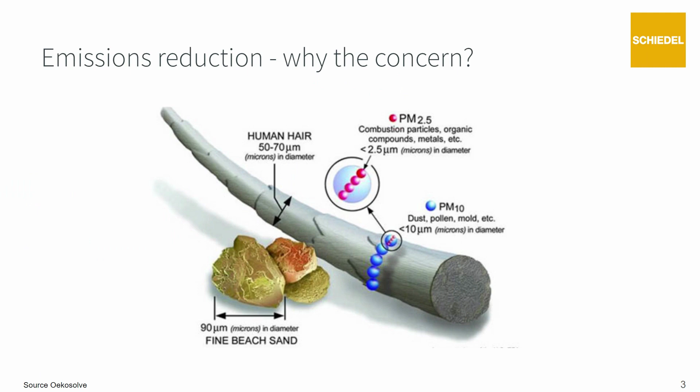So this is why there's concern, because once you breathe these particles in, they get very deep inside the lungs, into the bloodstream. So here is where the damage can be caused. When we breathe in air, we're breathing in a mixture of liquids, gases, and solids, which includes water and oxygen, but also dust, pollen, and other airborne chemicals and particles, which are known collectively as particulate matter, or PM.

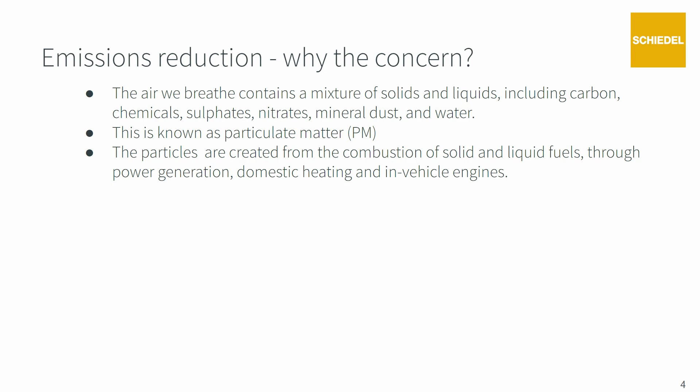The smallest PM particles are created from multiple sources, which include the combustion of solid and liquid fuels, power generation, domestic heating, vehicle engine emissions, and even friction from tires and brakes on vehicles. The most damaging particles are minuscule particles, known as PM10 or PM2.5. The most damaging particles are the very smallest because they get the furthest into the body. Invisible to the naked eye, they're small enough to pass through the lungs, into the bloodstream and into the organs where they can cause damage.

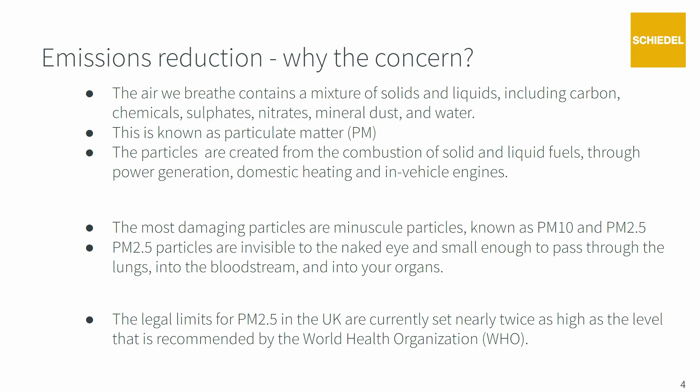Legal limits for PM2.5 in the UK are currently set at nearly twice the level that is recommended by the World Health Organization. So this is something that has to change and will be changing as we go forward. These limits are going to be reduced, and therefore we as an industry must play our part in resolving the issue. We have to lead the argument and we have to bring solutions to the table.

There has been a lot of scientific work carried out to study this area. One of the leading countries in Europe in this field is Germany. Following studies in Germany, they estimate that 16% of all fine dust matter can be allocated to emissions from wood-burning appliances. DEFRA in the UK originally estimated this figure to be 38%, but following more recent studies, they've now moved far more in line with Germany and other European markets, and now estimate the figure to be around 17%. So it's pretty much in the same ballpark as the German figures.

This fine dust can be highly toxic and there is a risk of disease of the respiratory tract and cardiovascular system. Fine dust is most concentrated close to the source of the emissions, so this is where action needs to be taken first. As we can see from the pie chart here, sourced from the Bavarian Office of the Environment, vehicle emissions from exhaust gases and dust from tires and brakes amounted to around 57% of total emissions in their study. However, as we know, things are moving forward. There is a major move towards electric cars. This will reduce exhaust emissions going forward, although not the dust from tires and brakes.

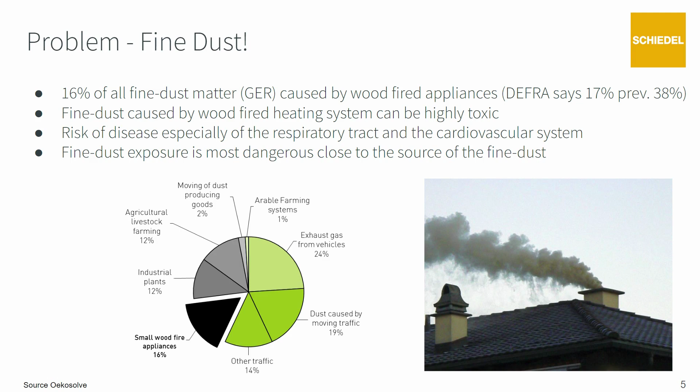So what are we doing as an industry? We too have got to move forward. Let's look at what we can do now to actually help with this in a practical way. First thing we can do is to ensure the best possible combustion of the fuels used within the appliances. We can offer room-sealed systems with controllable primary and secondary air. We should always use good quality fuel. So dry wood with maximum 20% of humidity will help.

A high-quality chimney system working with a high-quality stove needs to be well maintained. So the end user and the chimney sweep have a huge role to play in this. Schiedel recommends regular cleaning of the chimney system to maintain performance. This is covered in our installation instructions, covering ongoing maintenance post-installation, where we recommend that any chimney serving a solid fuel appliance should be swept twice a year. Even the correct lighting of the fire will help reduce emissions, so end user awareness is critical, and here the chimney sweep can also play an important role in ensuring that the end user is aware of best practice.

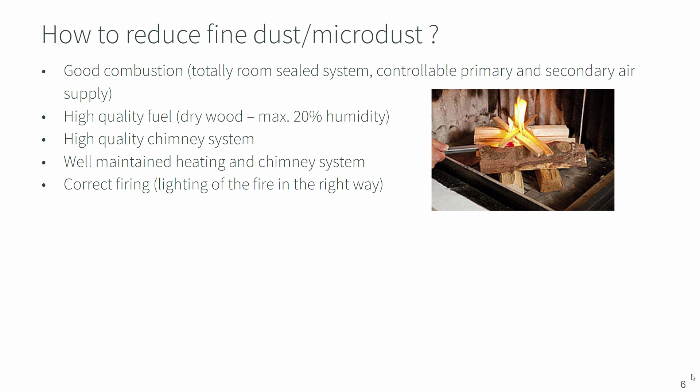We have already taken major steps within the industry. The Stove Industry Alliance, the SIA, estimates that by using an eco-design compliant stove using high-quality fuel, this would reduce total emissions of the smallest particles, the PM2.5, to less than 1.5% of total UK emissions of these smallest particles. Appliances accredited to Clear Skies, in an initiative led by our industry, will reduce these emission figures still further. This is great news going forward.

However, what about the appliances that are already in place and which do not benefit from this latest technology? This is where we need to be looking at things. We need to be providing solutions for the existing appliances to improve their performance and work with councils to show what can be done using retrofit solutions.

At a time when the cost of heating our homes is becoming ever more of a burning issue, the wood-burning stove can provide an economical solution, and together with the appropriate filter, can help reduce fine dust emissions by anything between 70 and 95%. Clearly, it will depend on the appliance that is in situ already. It will depend on the quality of the wood that's being burnt as to how efficient it can be.

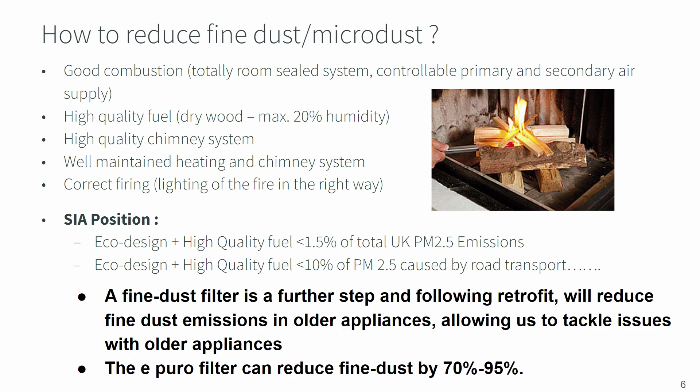As we build up in the cycles, it becomes more efficient up to a certain point, but then we need to ensure that there is regular maintenance and sweeping of the chimney to ensure the performance of the appliance is not reduced through the flue way becoming restricted.

So in terms of practical solutions, what can we offer now? When we look at the technologies that are already available out there, there are cyclones, there are wet dust collectors, and there are fabric filters. All of these things exist in the market now, but Schiedel has opted to go down the route of electrostatic precipitators, or ESP filters. The advantages we see are that, one, the process is highly efficient, even for particulate matter of less than 1 micron in diameter.

Two, the unit has a minimal effect on draft and therefore pressure drop within the system. And three, the unit has very low operating and maintenance costs. So we're looking at something that is using about the same amount of energy as a light bulb. And once in place, it is a very simple and low-cost solution.

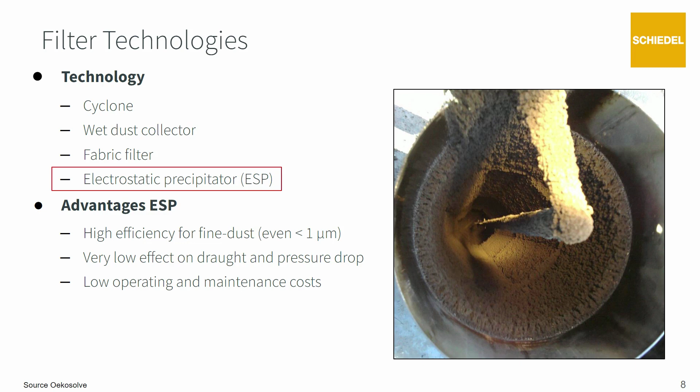As a drawback of ESP, if you have a power cut to your home, then this would interrupt the operation of the filter. But as soon as energy is restored, then operation will restart. But these days, I think we can say that we're fairly safe in terms of ongoing electrical supply.

The second issue is flocculation, or clumping of the particles. But again, through regular cleaning and maintenance of the chimney, this problem will be avoided. There's no need to sweep the chimney any more frequently where an ESP filter is being used. The standard cleaning cycle should be followed.

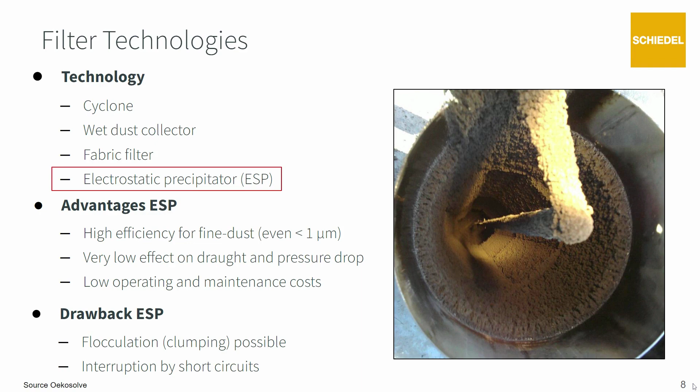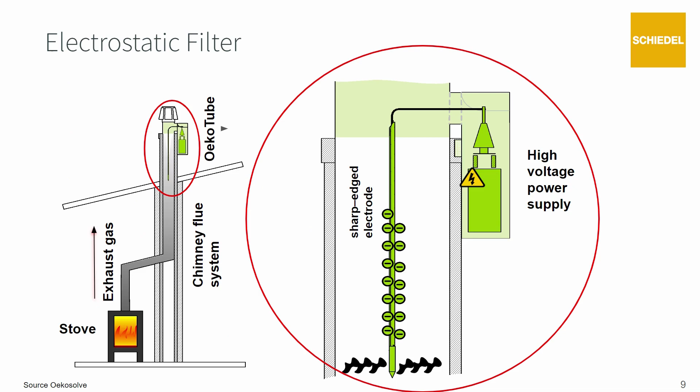So, the operation of the filter. The ePuro filter is used at the termination of the chimney. It is a retrofit product which is fixed to the existing brick stack and connected to a high voltage electrical supply. A sharp-edged electrode, which is made from spring steel, is inserted into place via the chimney kit.

The exhaust gases containing the particulate matter flow through the chimney in the usual way. Electrons are emitted via the high voltage electrode when connected to the current. The electrostatically charged particles move to the wall of the chimney. These particles then gather in clumps on the wall of the chimney and can be removed safely during the standard sweeping process.

The filter is supplied as a kit, including all fixings to attach the kit to the brick stack and to hang the kit from the branch of the chimney kit. The chimney kit consists of an anchor plate for fastening the kit to the brick stack, a T-piece which connects to the anchor plate, a pipe length which connects to the branch of the T, and locking bands to fasten the T to the anchor plate and the pipe to the branch of the T.

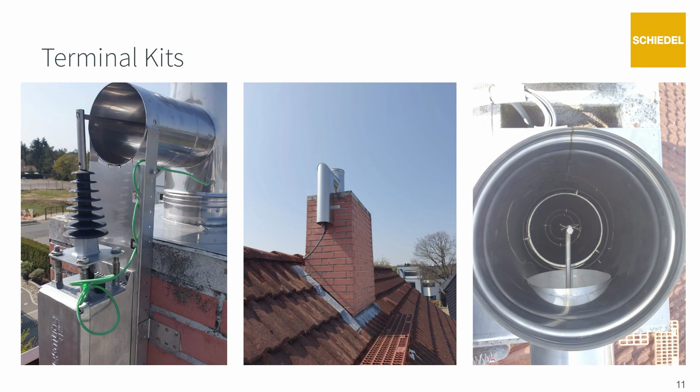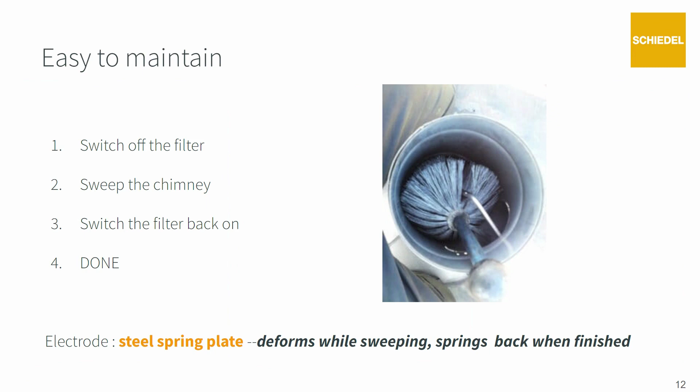Maintenance of the system is easy, as the electrode is made from spring steel, so it will simply deform and move to the side during the sweeping process and spring back into position once cleaning is carried out. Step 1 is to switch off the current to the filter. Step 2, sweep the chimney. Step 3, switch the current back onto the filter, and the product is now ready to go once again.